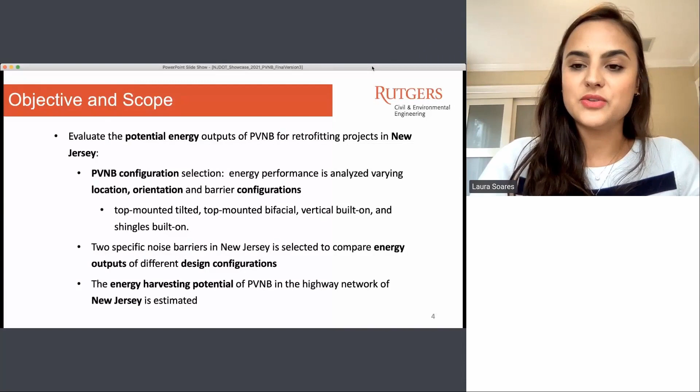So the methodology used was for the first part to understand the different configurations was to select 4 different locations in the United States with different latitude and global horizontal irradiance, and then simulate and analyze the energy performance in these different places.

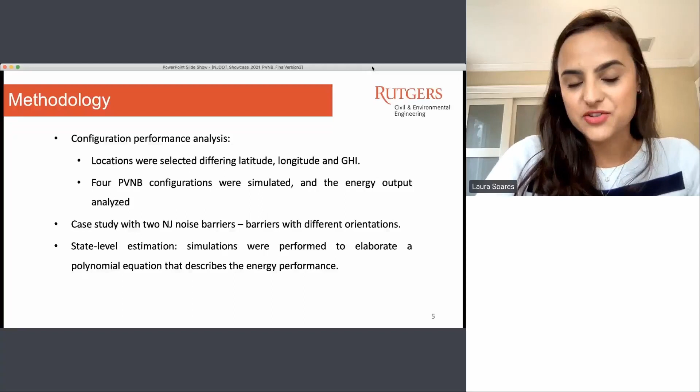Then the second step was to do also using simulation 2 study cases with 2 different orientations, one barrier facing south and the other one facing east-west. And then the last step was to find a polynomial equation that could describe the energy performance of different PVNB configurations to estimate the state level potential of solar energy harvesting from noise barriers.

So the first step was to choose 4 locations. The locations chosen were Phoenix, Arizona, Denver, Colorado, Tampa, Florida, and Seattle, Washington. And they have very different GHI, which is the solar radiation, as well as different latitudes too.

As we can see in the graph here to the bottom left, the lowest irradiation is from Seattle, followed by Tampa, Denver, and lastly with the higher global horizontal radiation is Phoenix, Arizona.

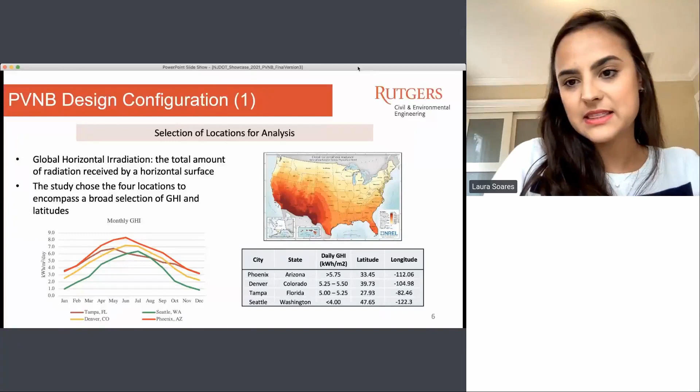And the noise barrier configurations that were studied are these 4 configurations. These configurations can be implemented in already existing noise barriers, so we can do some retrofitting in already constructed barriers instead of constructing from zero.

The first one is the tilted top mounted, where the solar panels are installed on top of the noise barriers with some tilt to optimize the energy absorption.

The second one is the bifacial top mounted, in which the solar panels are also installed on top of the barriers in a vertical position because these panels can harvest energy from both faces.

Then on the built-on configurations, we have the shingles, in which the solar panels are installed on the face of the barrier, but with some tilt to optimize the absorption. The last one is the vertical build-on, in which the solar panels are installed vertically on the face of the barrier.

For the simulation, we assume a barrier 500 meters long and 5 meters high. For the build-on configurations, we assume 2 meters of free space from the ground to the lowest part of the panel, to avoid more damage in case of accidents.

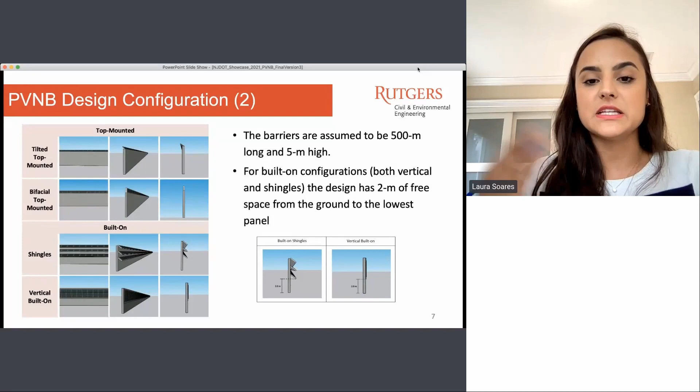So for these configurations, we did the simulation with the barriers facing south, which has an azimuth of 180 degrees, and with the barriers facing east, with an azimuth of 90 degrees.

This is very related to the amount of panels that these designs have; they have the most number of panels. However, if we see the vertical build-on, although they have the same amount of panels as the 3 shingles, the 3 shingles still have a better performance than the vertical build-on.

To understand not only the total annual energy, we also look at the energy per panel, so we can understand the energy density of each configuration, so we're not biased just to the number of panels that each configuration can provide.

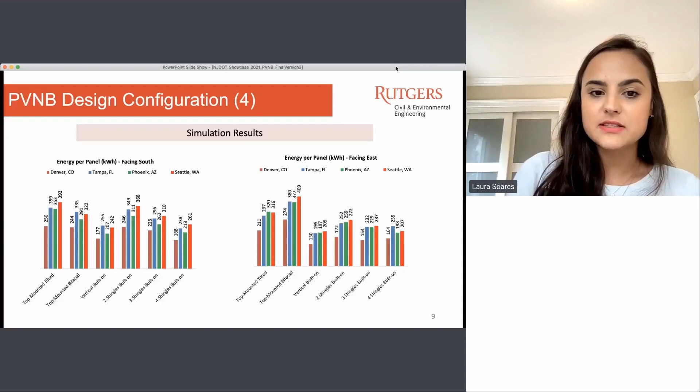In this graph, we see the energy per panel. For barriers facing south, which is the first graph, the top mounted tilted provides more energy, and this is for all locations. For the panels facing east, the top mounted bifacial is the one that provides more energy per panel.

With this study, our conclusion was that the best configuration will vary depending on the goal of the project. If the goal is to implement a more cost-benefit energy solution, maybe the best option will be the top-mounted, depending if it's facing east or south, would be the tilted or the bifacial.

However, in a situation where there is a limited amount of noise barrier and the goal is to harvest the most energy possible, maybe to provide energy for a rest area or for a street light, the 3 shingles or 4 shingles could be the best approach for this problem.

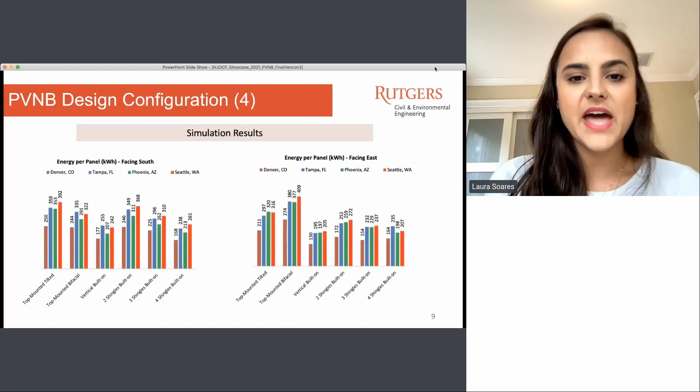So after this first study, we decided to do a case study in 2 different barriers in New Jersey, one facing south and the other one facing east.

So we did a simulation with this tilt. We found an annual energy output of 98 megawatt hours. For the top mounted...

mounted bifacial, the design is a little bit more simple. It's basically a 90 degree panel on top of the noise barrier, harvesting with photovoltaic material on both faces of the solar panel. The annual energy output was 92 megawatt hours.

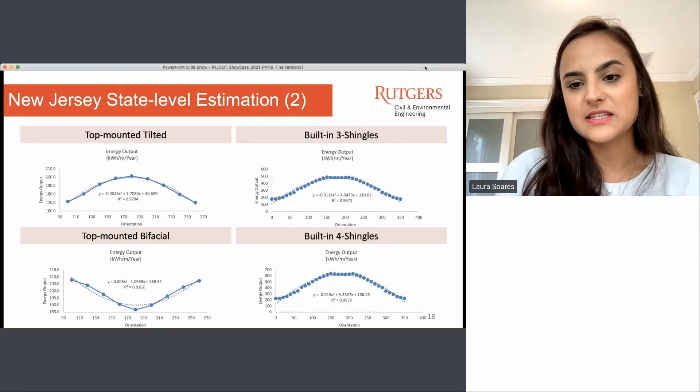So this was the result for top-mounted tilted: 27,000 megawatt hour per year, which could represent lighting 1,600 miles of street lights, representing 4.2% of New Jersey public roadways.

For the top-mounted bifacial, 21,000 megawatt hour per year. The 3 shingles can produce almost 49,000 megawatt hour per year, and for 4 shingles, 56,000 megawatt hour per year. This could represent more than 3,000 miles of street light, which is 8.6% of New Jersey public roadways.

So with this project, first we found that projects aiming for the highest energy should prioritize 3 and 4 shingles configurations. However, projects prioritizing cost benefit should prioritize top-mounted configurations - when facing south it should be the tilted, facing east-west should be the bifacial.

The vertical built-in may be selected due to its aesthetics, since it's vertically implemented on the barrier. However, in terms of performance, it's not the best for the highest energy or for the highest energy density, which is energy per panel.

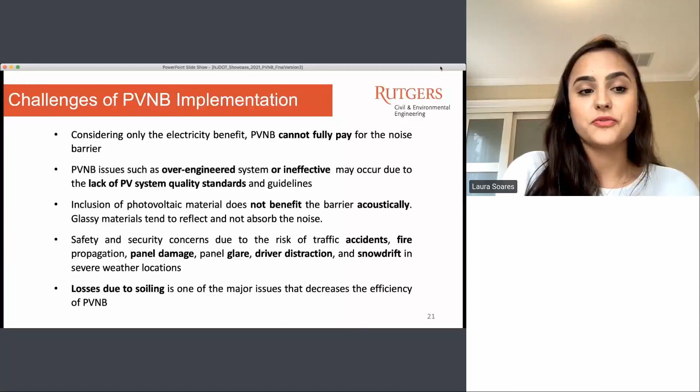There are also some safety and security concerns as well - risk related to traffic accidents, fire propagation, panel damage, panel glare, driver distraction, and even snow drift in severe weather locations. And lastly, there is an efficiency loss due to soiling. Close to the highway, traffic produces a lot of dust, and this can decrease the efficiency of the photovoltaic noise barrier.

So for future work, we want to develop a decision-making tool to assist in PVNB implementation. We want a tool where you can input a barrier you are studying for implementing the photovoltaic noise barrier, and the output will be the energy output as well as recommendations. We will consider technical viability, social impact, and cost benefit analysis in this tool.

And lastly, I want to say a special thank you to the New Jersey team that helped us with their expert contribution and assistance - Giri, Edward, and Pragna. That's it, thank you very much.

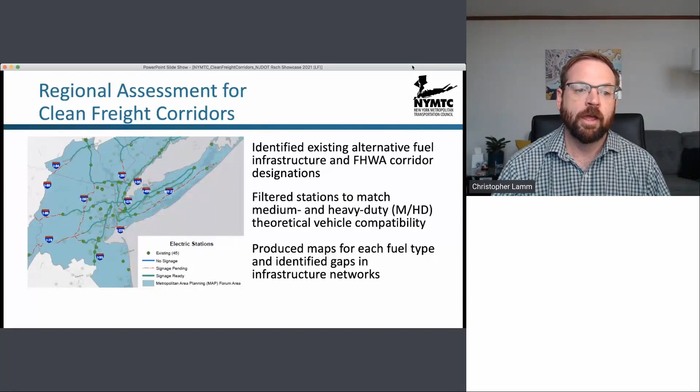So on the next slide, we see, for example, looking at compressed natural gas stations, there are 31 such stations potentially available to trucks in the region. On the right, the yellow buffers surround gaps where corridors are not signage ready and where there are few, if any, stations located in or near those corridors. So for CNG, most of the major highways in the region are a visible gap in existing infrastructure.

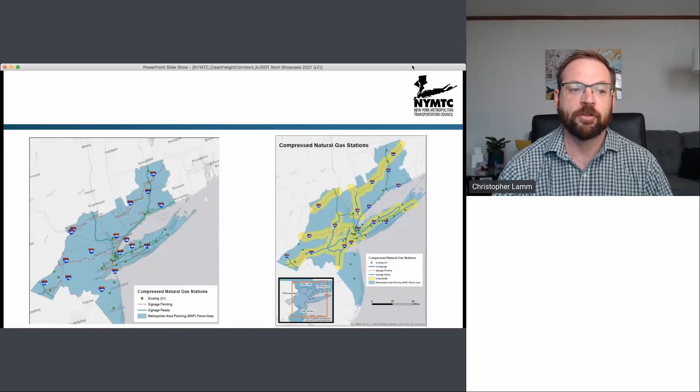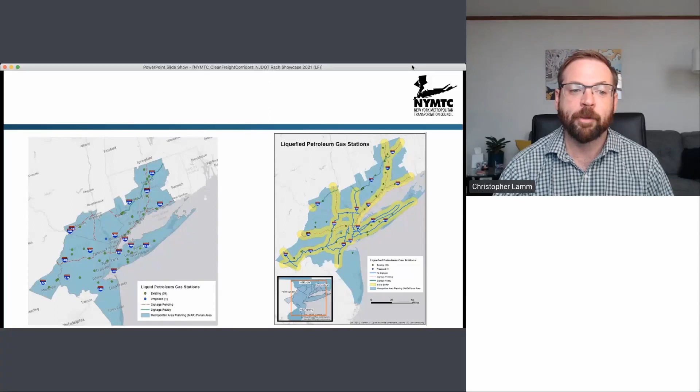On the next slide, we've done the same exercise for LPG, where there are currently or proposed a total of 40 sites in the region. And again, most of the highway network across the region is a visible gap for LPG stations.

The following slide looks at hydrogen. Hydrogen is not nearly as built out as any of the others, with only one existing station in the region and only 4 proposed. So therefore, the entire major highway network in the region is a gap for hydrogen.

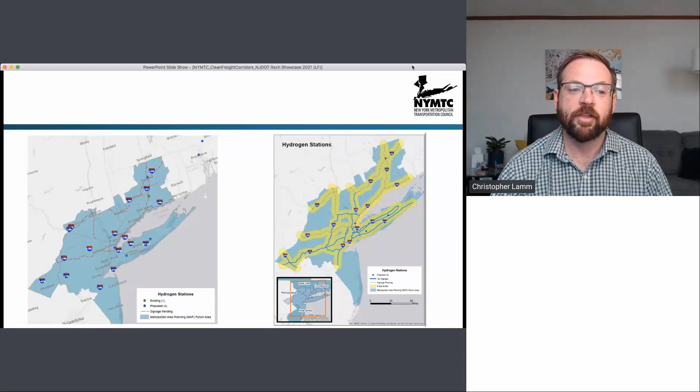And then finally, electric is a bit different from the others. There are well over 100, nearly 200 charging stations around the region for electric. But once we applied some filters to filter out proprietary sites, such as ones that are specifically built for Tesla and only Tesla, or other proprietary sites, ones that are not fast charging, ones with fewer than 2 fast charging dispensers, those filters kind of brought us down to a number of 45 charging stations within the region.

And even some of those may not necessarily be accessible due to parking lot geometries or location specs that may not be able to accommodate large heavy-duty vehicles. So we see that most of the highway corridors are designated by FHWA as signage ready in the region for electric, but that's again based on access for passenger vehicles, and heavy-duty vehicles do not have access to all of those facilities. So we can't necessarily rely on those designations as much for electric because there's an incompatibility issue there with trucks. Therefore, most of the region does remain a gap for fast charging for heavy-duty vehicles.

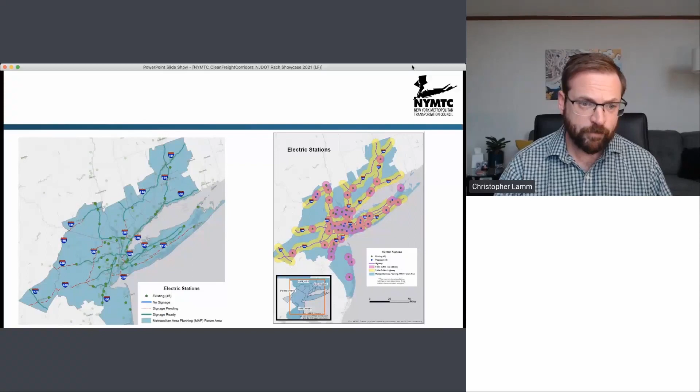Next slide, please. So task 3 is where we're doing a little bit of a gaze into the crystal ball and trying to project out into the future the potential for adoption of alternative fuel vehicles in these motor carrier fleets.

So that crystal ball includes a model looking at total cost of ownership under different scenarios to estimate how aggressively or not aggressively alternative fuel vehicles may penetrate into the fleets that are operating on the road.

This is a proprietary model called the Heavy Duty Vehicle Adoption Rate Model, developed by our partner CALSTART. And it estimates the total cost of ownership for vehicles in each fuel type category, taking into account a number of different cost drivers, including purchase price, the incentives, including point of sale incentives available in each state of the study area, the costs of maintenance, the cost of insurance, title and registration, fuel economy and fuel price, and a number of other metrics.

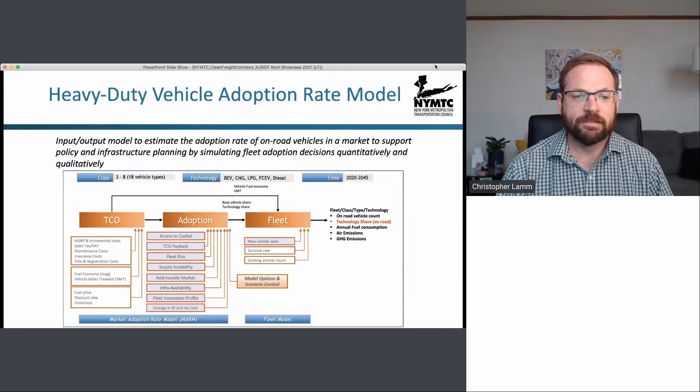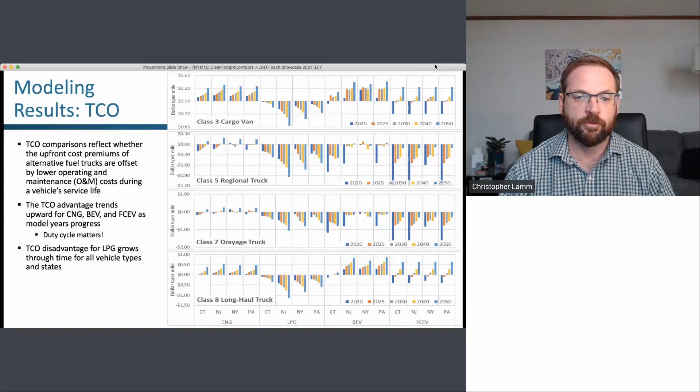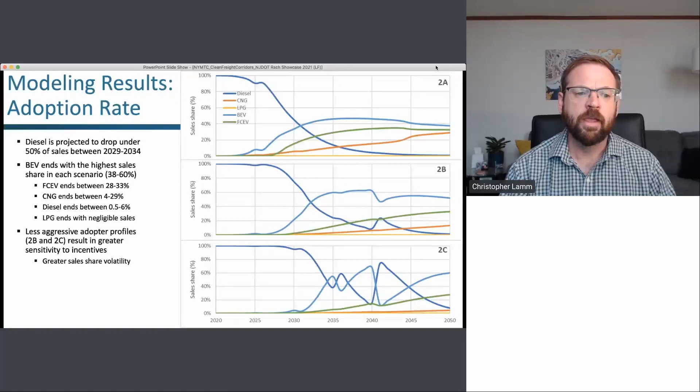On the next slide, we've done the same thing for the zero emission technologies.

For hydrogen on the left, vehicle pockets are expected to get denser over time as fuel costs come down appreciably in coming years. The total cost of ownership model anticipates more hydrogen vehicles as a result, with darker blue colors in central Long Island. We also see large clusters on Long Island, New York City, and northeastern New Jersey for electric, shown in green. The size of the pockets for electric are larger than any other fuel type, as we're anticipating battery electric to become dominant by this point in time, and the distribution of trucks on the map illustrates that expected outcome.

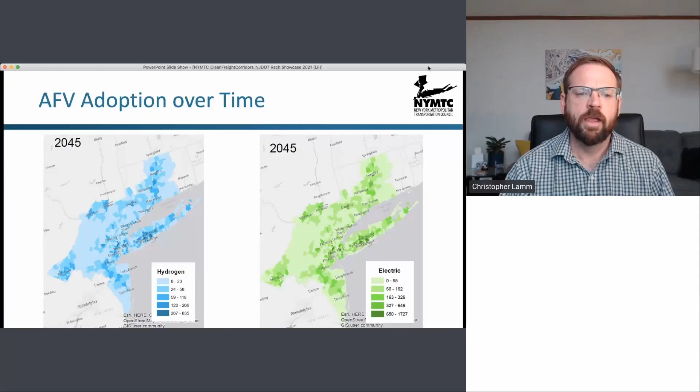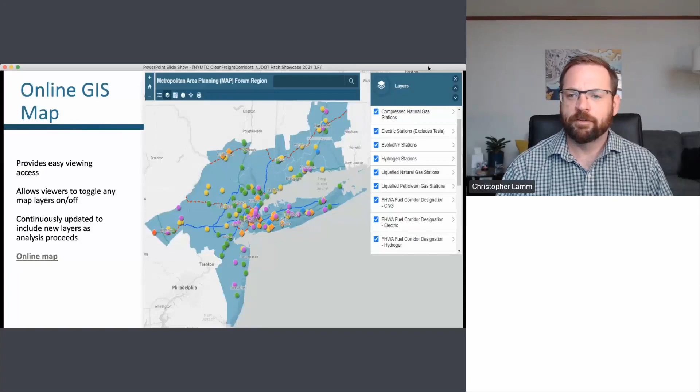On the next slide, we get into Task 4, where we start looking at freight demand trends and forecasts: how much freight is moving by truck, how that's likely to change, and maybe even change the size of the truck fleets we're likely to see in the future.

We started by looking at commodity flow data from a vendor, IHS Markit, using a data product called Transearch, that estimates commodity flows now and into the future. 88% of the freight tons in our 4-state region study area move by truck, and the total volume, measured in tons, is expected to increase 37% between 2018 and 2045. This shows a substantial reliance upon trucking in the region to move goods, more so than the national average, and the growth in tonnage is expected to increase as our population and economy are projected to grow into the future.

We took these commodity flow patterns and wanted to look at the travel patterns of trucks in different highway corridors in the region, so that if we're looking at trucks that use a certain highway and are emitting in certain communities, what would it take to transition the fleets using those highway segments? Understanding the travel patterns and who's using those highways is useful for wrapping your head around that.

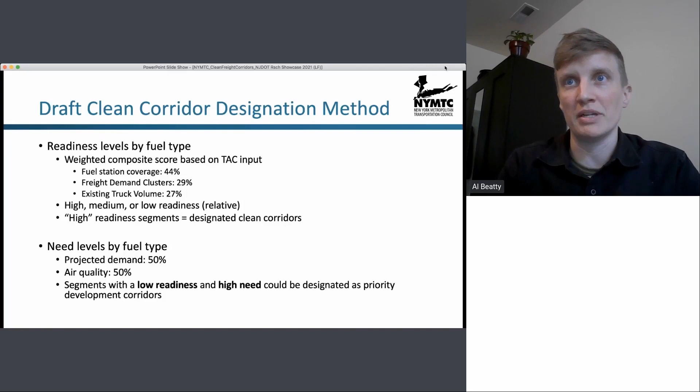So we also developed a need score. It's a little simpler—it consists of projected demand that we calculated in an earlier task and air quality. We combined those two things and found that segments with a low readiness currently, but a high future need, could be designated as priority development corridors, since there's a mismatch between where they are and where we want them to be in the future.

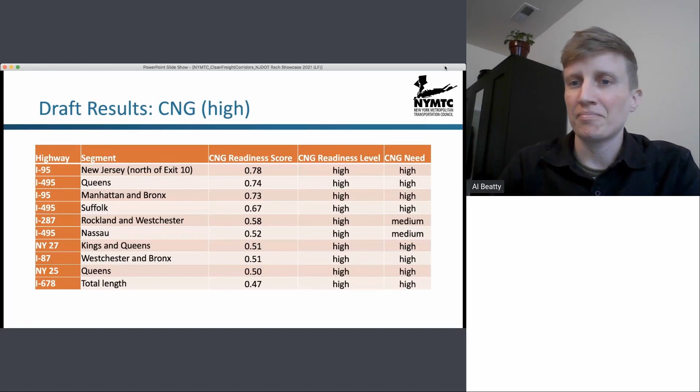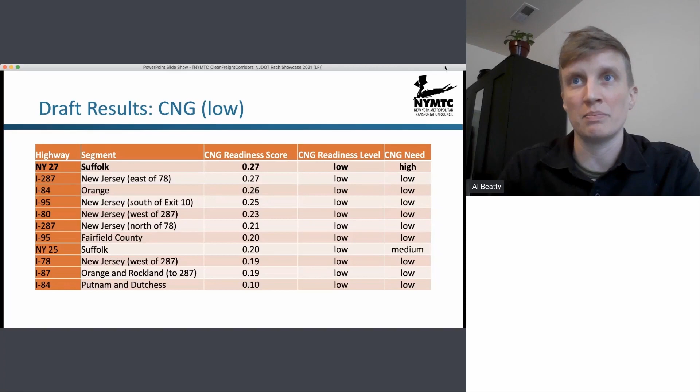Similarly, these are the highway segments that scored low for readiness level for CNG. Like the high scorers, these are mostly matched with the future need—you see a lot of low and lows. There's one exception, which is in Suffolk County on Long Island, New York 27, which has a low current readiness but a high future need. That would be an example of one we'd want to designate for development of infrastructure, even though it doesn't meet the earlier criteria I mentioned for readiness.

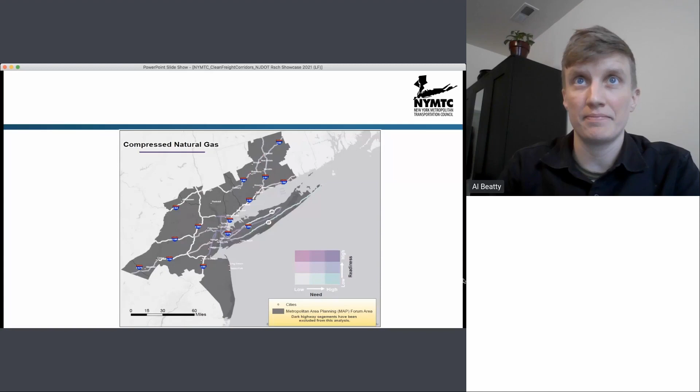I won't spend too much time on these, but you can see here we have the same maps created for electric vehicle charging infrastructure.

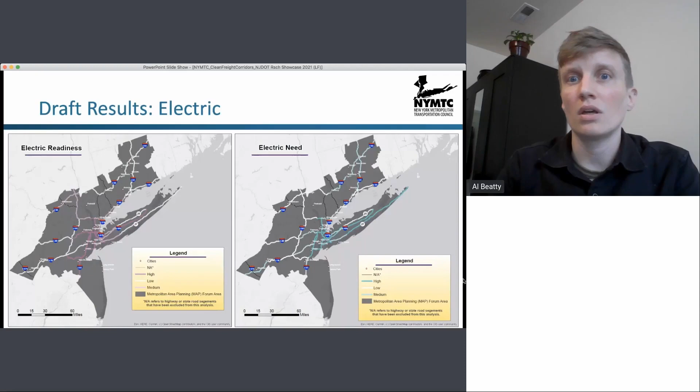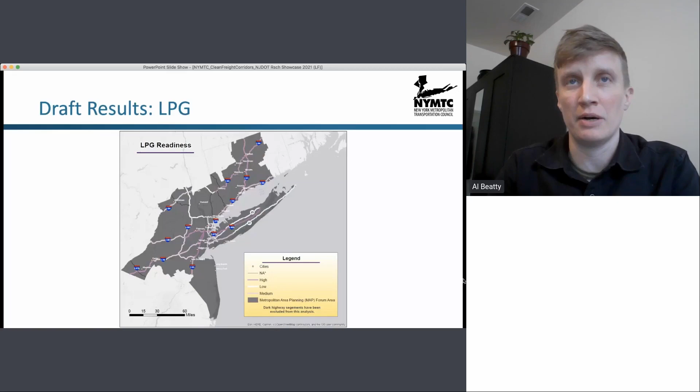Next slide, please. For hydrogen, next slide. And then for LPG, which as Chris mentioned, has a pretty low forecasted demand, we don't actually have a need score developed for that since it's across the board low, but you can see readiness there. Next slide.

So we also want to think not just about these designations, but looking ahead to implementation, not just where should we develop infrastructure, but how. And so a couple of really key notes on policy for this investment.

Number one, you have to keep in mind that trucks are not cars. So not just any fueling station, say a charging station, to use electric as an example, is going to be useful for a heavy duty vehicle, a large tractor trailer. So in developing infrastructure for trucks in these priority corridors, you have to ensure that the physical dimensions of the sites can accommodate heavy trucks. That includes the fueling stall dimensions as well as the ingress and egress points to the site itself. And in order to do that right, it's really important to have industry input.

And similarly, everything is coordination. So you also need to coordinate with utilities to make sure that you have the appropriate fueling loads, whether it's megawatt loads for electric or natural gas distribution capacity or hydrogen fueling sites. Next slide, and I'll pass it back to Chris.

All right. Thank you, Al.